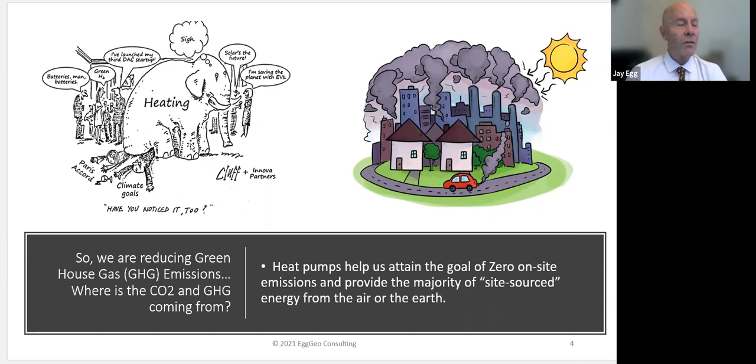While the elephant in the room is the heating. It's 40% of our emissions. If we don't decarbonize our building heating, we're not going to get there. And so I love this political cartoon for this.

It will take thermal energy networks to make heat pumps a reality for some of the reasons that I'm going to share. Some of the reasons are accessibility, but other reasons have to do with the electric demand, peak demand profile of our grid as we convert over to an all electric building stock.

So a few of the advantages that people don't think about as we convert our buildings to thermal energy networks are that there's no more outdoor equipment to replace. We are much more hurricane and storm resilient. The longevity of the equipment goes up because that's the #1 reason for degradation, being outside in the weather. We, of course, eliminate combustion boilers. We also eliminate cooling towers, which I have a whole 4-hour presentation just on the benefits of that.

So we have superior comfort in heating and cooling modes because of some thermodynamic properties of dealing with a more stable heat source and heat sink. The fact of the matter is that a heat pump is a heat pump. So as far as more cost, if we have a thermal energy network, it's the same price as any common garden variety heat pump to install a geothermal heat pump. It's just a water source piece of equipment.

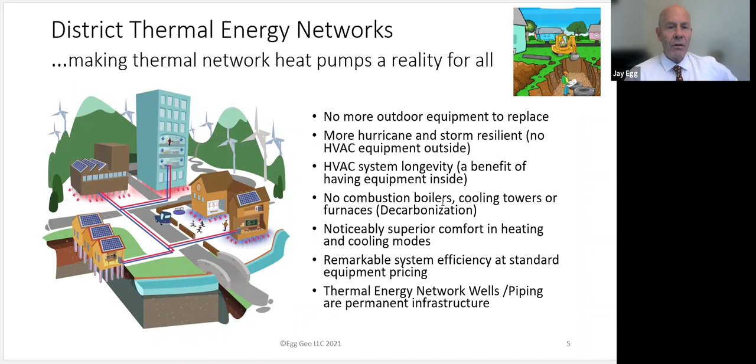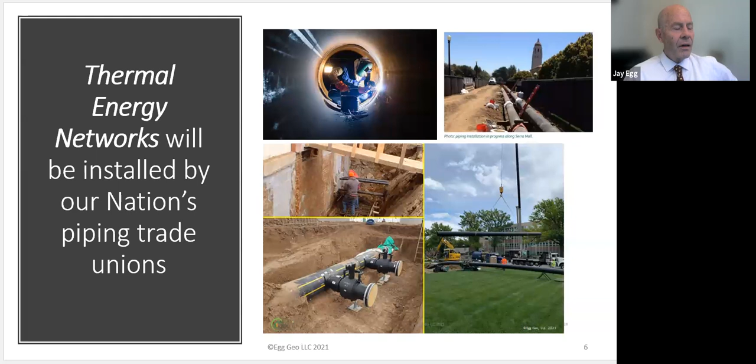And of course, this infrastructure that ends up going in the ground is permanent infrastructure. Once it's in the ground, it's going to be there basically forever. Especially using the high density polyethylene materials that are going in, though the manufacturers typically warrant those for 50 years. The Plastic Pipe Institute thinks 100 years is more reasonable as an estimate of their lifespan. And in the back room, we know honestly that this type of material lasts more like 300 years, though we don't have the history to prove that. It's just an amazing product.

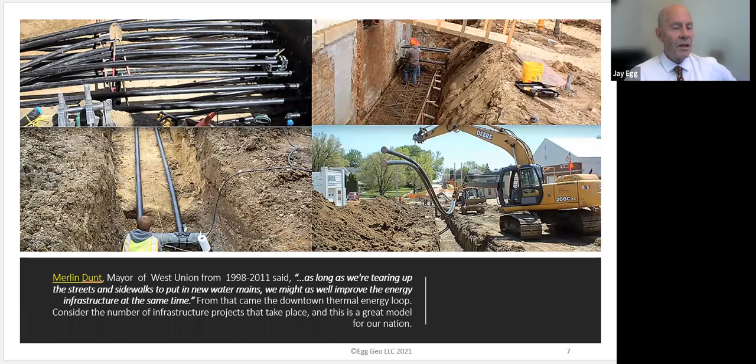So at any rate, these systems can go in with other infrastructure as we upgrade water lines, drinking water lines, sewer lines, even other infrastructure that may be going in. Maybe a little too late for the fiber optic networks, but we're using a lot of that information to help.

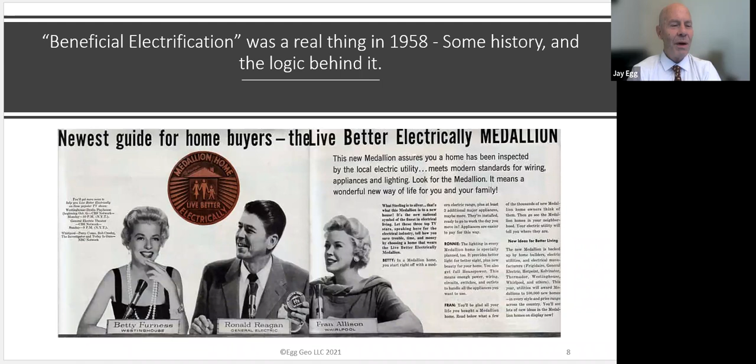A funny thing, and many of us will remember Ronald Reagan as a president of the United States in the 80s. Back in the 50s, he was a spokesman for the National Electric Manufacturers Association. And this is him actually pushing for live better electrically, buy a total electric gold medallion home. And isn't that amazing? Now, at the same time, what most people didn't know was going on was that the fossil fuel industry was installing natural gas pipelines faster and with more horsepower than anybody else.

So during about the time that this was happening, the US had just come out of the Second World War and was going through a revolution of sorts of piping oil. As a matter of fact, we did our first big oil pipelines between Texas and New York because the German subs were sinking our ships that were tankers that were taking oil from Texas up to New York. They sunk 76 of those ships before we even knew what happened. So they had an emergency funding of this transcontinental pipeline to get the oil from Texas to New York. And guess what? They piped it in 350 days, 2 separate pipelines in 350 days.

The fossil fuel industry learned they could do this, and so they started piping natural gas. And over the next 20 years, 1.5 million miles of natural gas pipeline went in and connected to 40 million more homes than were already installed. So the reason I tell that is twofold: to tell you how the natural gas distribution networks got such a foothold. There's now more than 2.5 million miles of natural gas pipeline in the ground, serving more like 80 million US customers. But the #1 cry for foul is that we can't possibly put in these thermal energy networks. It's too much work.

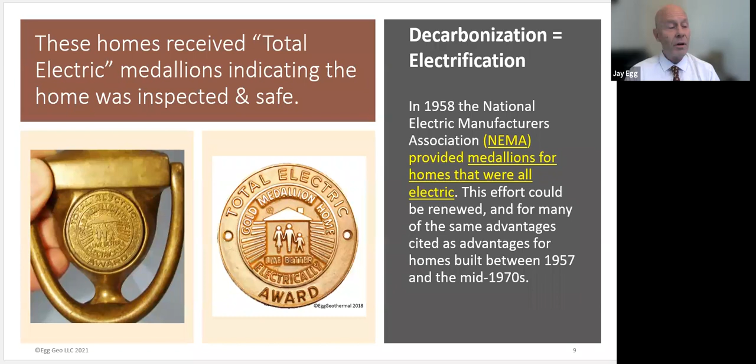Not true. We did it in the 50s and 60s, and we continue to install natural gas, or at least we used to continue to install natural gas pipelines. But we can do anything we need to do, and we need to do this. We need to pipe thermal energy to every doorstep, starting with our big cities and even our suburbs, because they need it too, and moving on. Now, let's talk a little bit about why.

Everybody's crying foul about, okay, we've got a summer peak load profile that we can manage. We'll never be able to handle a winter peak. Look what happened in Texas winter before last, when their electric grid almost collapsed due to a 1-week cold snap. So here lies the real illustration of what we can do.

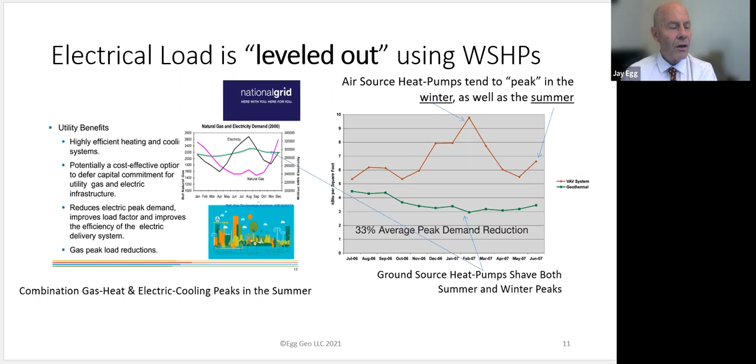For those that may be watching, and I think that we have about 45 or 50 people on, some of you may not understand how heat pumps are rated. They're rated in coefficient of performance. And just to bring it all home, 1 kilowatt of electricity through an electric resistance space heater or anything like that is going to give you 3,412 BTUs of heat.

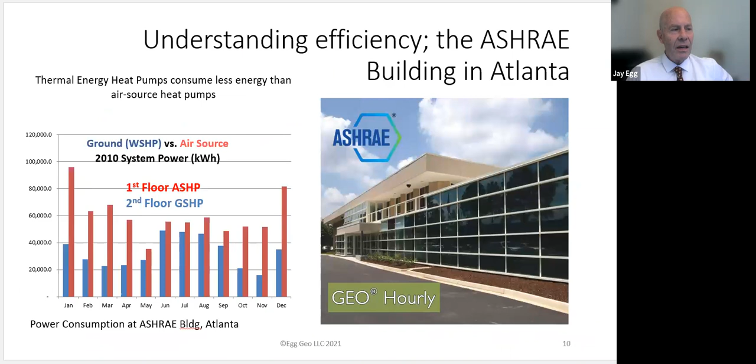It's easy to see with a 5.0 coefficient of performance how we can take something that's extraordinarily peak heavy, like you saw with the air source heat pumps here and here, and we can shave that electrical consumption and level the grid.

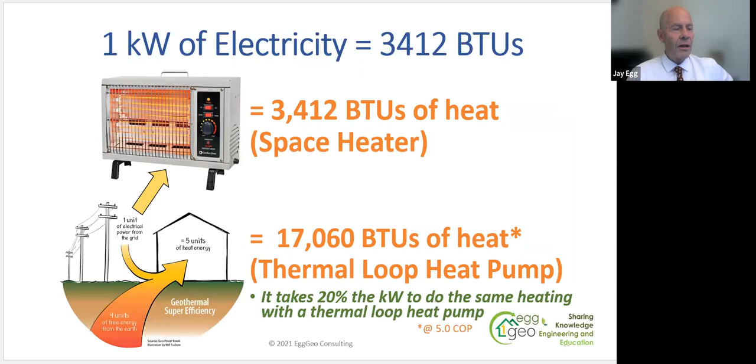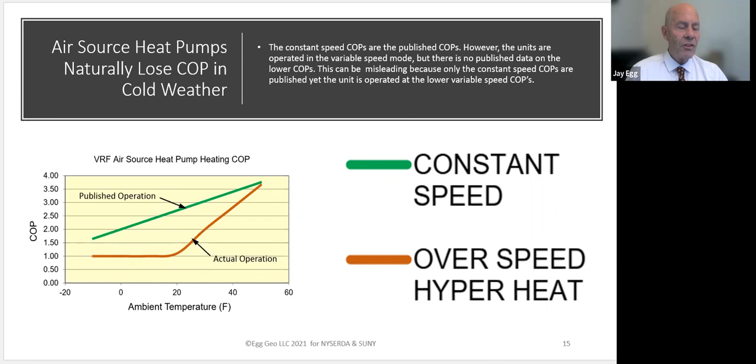Just a quick load profile of how air source heat pumps work at about 40, and I'm sorry, this is in US, at about 45 or 50 degrees Fahrenheit. They have a published operation that goes all the way down to -20. The fact is, as proven by the US Department of Energy in many, many different studies and other private entities, once they hit about 20 degrees, when you consider all the defrost operations and everything else going on, they pretty much hit one COP. You might as well just be using an electric resistance heat strip. And therein lies the issue. And this is one of the DOE reports on several heat pumps throughout the United States.

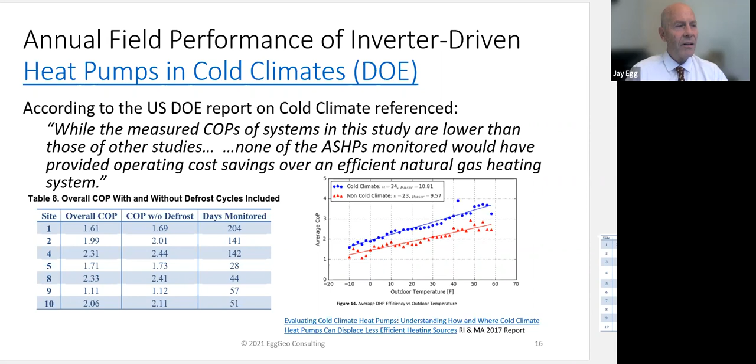Let's talk about the difference between a natural gas distribution network and a thermal energy network. In a natural gas network, you need a pipe in the ground. So what is supplied through the pipe is natural gas, which goes to a furnace or boiler, a combustion appliance, to provide heating, typically heating only. A thermal energy network, what do you know? The same thing in the ground. It goes to a box that looks a lot like a furnace. It's an air moving or a water moving device, and it operates at 300% efficiency using the Carnot refrigeration cycle and provides not heating only, but heating and cooling and domestic hot water. What's the source? Thermal energy, earth exchange.

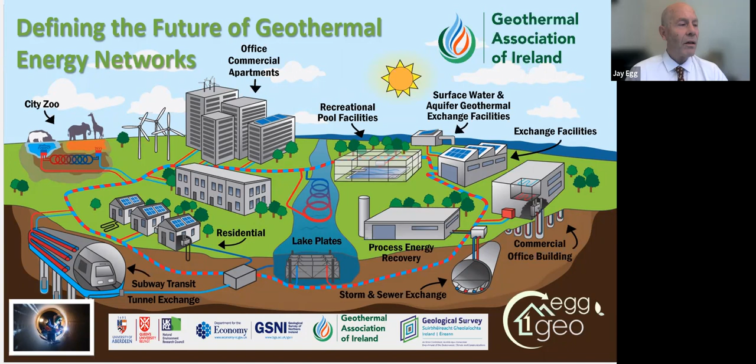If you go back and look at the illustration that we started with, you'll notice that it's a constant loop because it's renewable energy. Where is it picking up the energy in the wintertime, where is it depositing the energy from the buildings in the summertime? Different heat sources and heat sinks, such as surface water exchange, wastewater thermal energy exchange, other infrastructure that might be available, such as subways, building structural pilings. Other imbalances can be handled by other exchange facilities that are developed for the thermal energy network. And every one will need to be designed for their different thermal eccentricities, but it's all a simple infrastructure solution. Pipe in the ground is all we need.

A lovely example, there are hundreds of different hybrid variations of these things. And the reason I bring up this one from Cornell, they have a hybrid variation that is very unusual. They're on the surface of a lake that has 42 degree Fahrenheit water at the base of the lake year round. And they're able to operate their entire cooling loop, their chilled water loop for the campus, on just passive thermal energy exchange with the lake. We're not even beginning to look at all of the opportunities we have for thermal energy exchange. To not have to run chillers most of the year is extraordinary, and there are many examples of this.

Where they are getting their heating energy now is from their combined heat and power plant. They create all of their own electricity by burning natural gas on site. What they are going to be doing, and they're drilling for presently, and this is not a low temperature application, but it just goes to show you can do anything you want in your city when you design and engineer it. And they got funding to go down to a deep direct, maybe an enhanced geothermal source they're drilling for now between 4 and 6 kilometers.

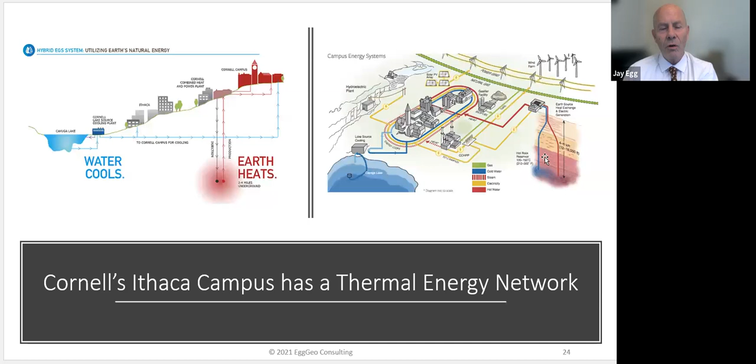They built, and you can see the building here in 2016, this campus, which used this thermal energy exchange loop field to come in through these headers and go to a central heat pump plant. You can see the exchanger here where some of the engineers are doing a tour with me back in perhaps 2018. So this is a standard geothermal exchange. It doesn't use a separate sink for the chilled water loop as compared to a source for the heating. Most of them just use heat pumps these days and do this exchange.

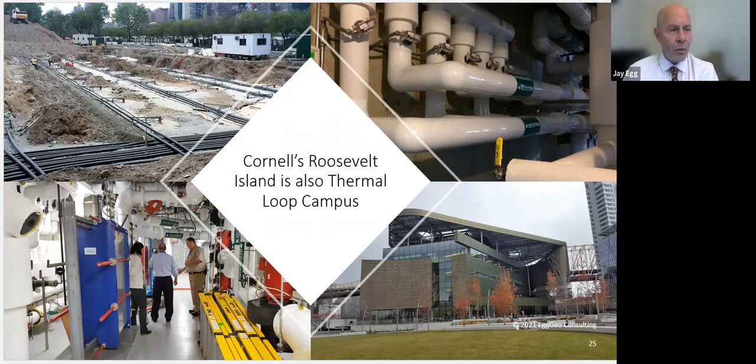And you can see that what NYSERDA, the New York State Energy Research and Development Authority, is asking us to do is, okay, you can do this. We understand you can do a thermal energy network for this, but we want you to cross property boundaries. We want to see what will happen if you diversify your load further than just one property owner. So what NYSERDA in New York State is doing is they're paying many different entities. There are actually 30 of these projects funded presently, and the next round will, I'm sure, triple that. But they are paying us to figure out how to cross boundaries. And here is why that's so important.

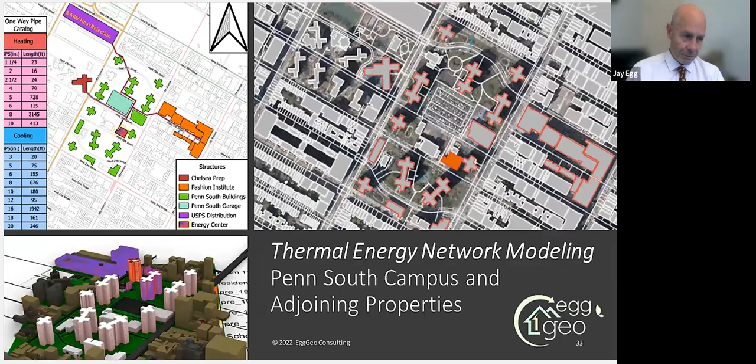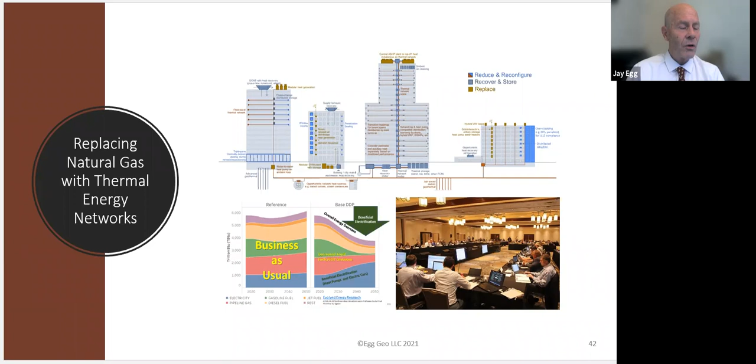And what you see is several other opportunities here. We have been able to get a lot more neighbors involved in this, but this is one of the college campuses. Up here is the Amtrak station at Penn Station, where all of the subways meet together. And it goes on and on. So my point, as I finish this up, because I want to leave some time for Q&A, is that these thermal energy networks reduce overall energy consumption. They eliminate the fossil fuels or reduce them dramatically. It increases electrical consumption in a very sane and safe way because of load diversification.

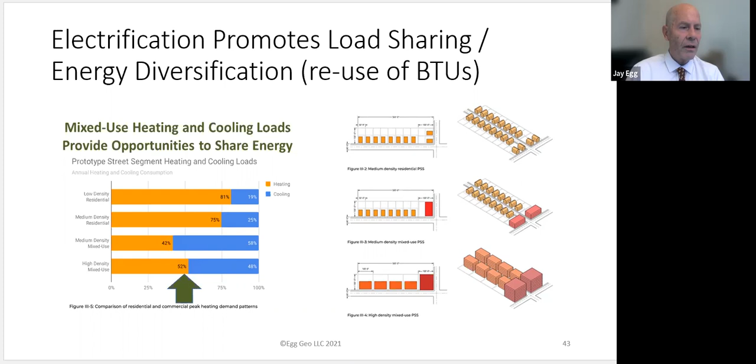High density mixed use in Massachusetts, for which this study was done for HEET by Buro Happold, shows this close, meaning 52% of the energy annually is used for heating and 48% of the energy used annually is for cooling. It shows how a thermal energy network does solve really and truly all of the problems that we face with managing our thermal energy.